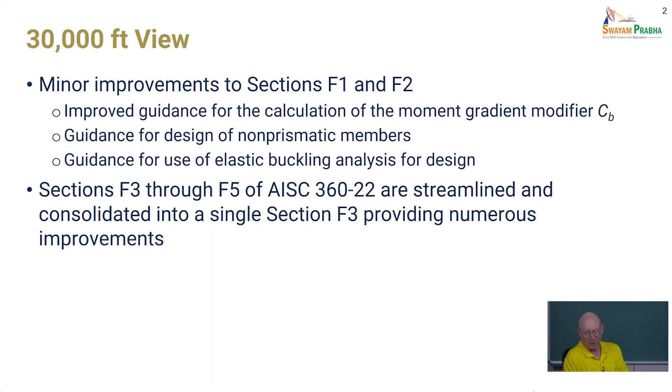Provide guidance in the specs to make it clearer how we can use elastic buckling analysis for design. So some of that is showing up in sections F1 and F2. But the major change in the 2027 specification cycle is to take sections F3 through F5, which addressed more general I sections previously, and consolidate those three sections into one section F3 that has a number of improvements in it. So I'd like to show you how the new provisions are working, and I'll relate what I show you here back to what's in the current standard.

So the way the new section F3 sets up is when we're looking at calculating flexural resistance, we consider three limit states. Number one, yielding and web local buckling. So we're going to look at that first. And that essentially sets a plateau resistance for the section.

This is similar in Eurocode, where if you have a class 1 or class 2, you have a plateau, right? And the resistance is the plastic moment. If you have a class 3 section, then the resistance is reduced. I think we have a little more detailed approach there, essentially a linear transition between plastic moment and yield moment in that range.

And if we have a slender web, well, that would essentially be a member with a class 4 web, and we have a reduction factor that approximates what we'd get in Eurocode or in the Indian standard by applying an effective width reduction to the web.

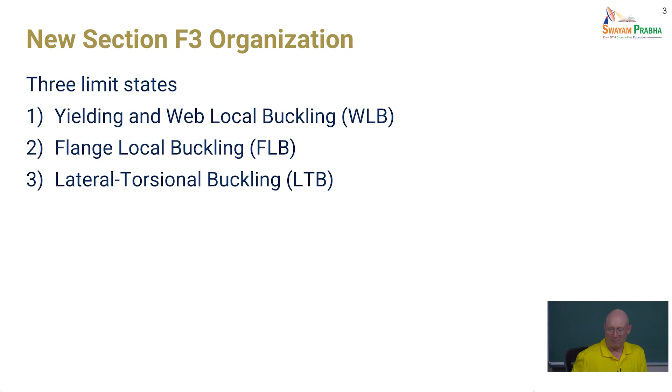Once we have that, then we'll look at how we use that with checking flange local buckling and lateral torsional buckling. So the first bullet here is pretty much what I just said. The plateau is defined here by the yielding and web local buckling limit. And in large part, the provisions are equivalent to the AISC 360-22, the current specification in sections F4 and F5, but everything's consolidated and there's some improvements here in the calculations.

If you dig into the sections F4 and F5 at present, you see some reduction factors called RPC and RPT. Those have disappeared. But the expressions are still the same, they're just written more directly without those factors. And there still is what's called a bend buckling strength reduction factor if you have a slender web. That was called RPG in the current specifications, and we've modified that to RB for bend buckling in this specification.

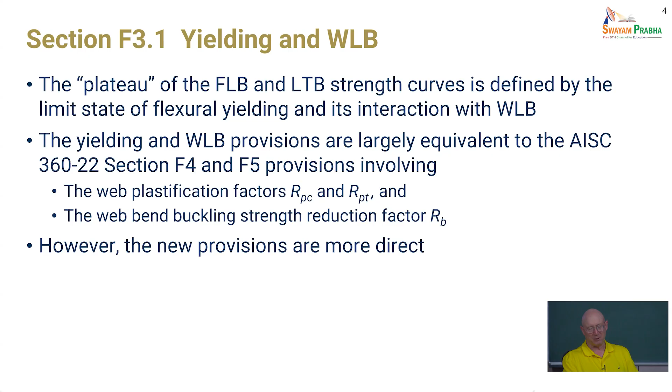So the way the calculation of that plateau strength works, if you've got a compact web in AISC, I'm going to refer to Eurocode a lot, knowing that the Indian standard is largely very close to Eurocode, so I'll mostly just make comments back to Eurocode here. If we have a compact web, it's basically class 2 in Eurocode.

So we're looking to be able to develop the plastic moment resistance. There are other limits that would be equivalent to Class 1, but the main specification provisions are just focused on calculating strength. The plateau strength is referred to as M subscript W, and it's equal to MP.

If you have a compact web, if the web is non-compact, then there's simply a linear transition between MP and MY, between essentially a Class 2 limit for the web and essentially a Class 3 limit for the web.

So Class 4 is what in AISC we would call a slender web. And then when it's a slender web, the strength is less than the yield moment, but rather than work directly with an effective width calculation in the web, we have a rather ancient equation that was developed way back in the day by Professor Basler in the early 1960s.

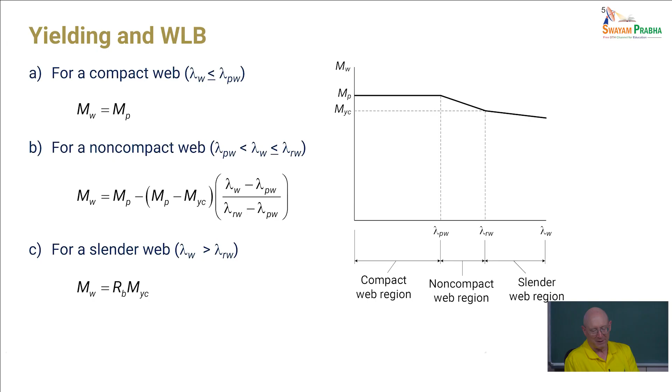That equation is the RB equation, was denoted RPG in the previous, in the current AISC 22 standard. So a fairly significant change here is with singly symmetric sections that have a larger flange in compression. So if you have a large flange in compression, your neutral axis of the section moves closer to the large flange, right?

If the section is doubly symmetric, or singly symmetric with the smaller flange in compression, we calculate a yield moment, or yield moment to the compression flange, as the yield stress times the elastic section modulus. HCY is basically the web depth in compression at yield, equal to the elastic depth of web in compression. So for singly symmetric sections, the tension flange has a smaller stress when we reach the yield moment, while the compression flange has a calculated stress just reaching FY.

If it's a section with a larger flange in compression, we've implemented a mechanistic calculation of yield moment when the compression flange first nominally yields. For this type of section, we get first yielding at the tension flange, then a spread of yielding up the web as we increase the moment. Once we reach nominal yielding of the compression flange, you get a stress distribution like you see here. HCY, or HCY over 2, is the depth from the bottom of the compression flange to the neutral axis for this stress distribution.

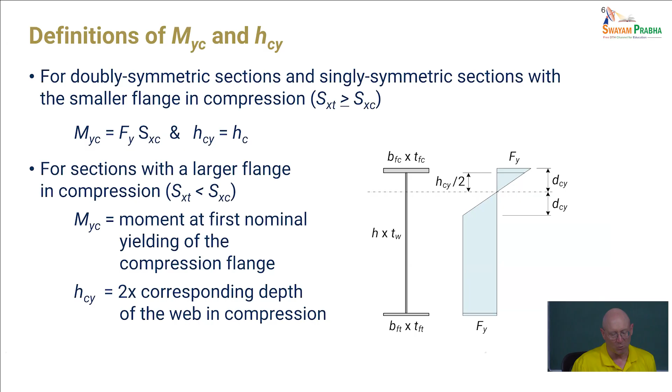Just like if you had a composite section—say a composite slab in positive bending, with effectively a large compression flange at the top—when we design composite girders, we allow extensive yielding through the web in calculating their strength, usually counting on the plastic moment. This essentially parallels that. Your MYC is a moment at first yield that we use as a base for continuing the calculations, but MYC in many sections that behave this way is very close to the plastic moment.

Along with that, there's an equation currently case 16 in the AISC table B4.1b, a more general equation for a compact web limit. Compared to the equations in Eurocode for Class 2 web, it's a fairly reasonable approximation, but a little more succinct. The compact web limit is a function of the ratio of plastic moment to yield moment. For doubly symmetric sections, the ratio of HCY to HP becomes 1, and the equation simplifies.

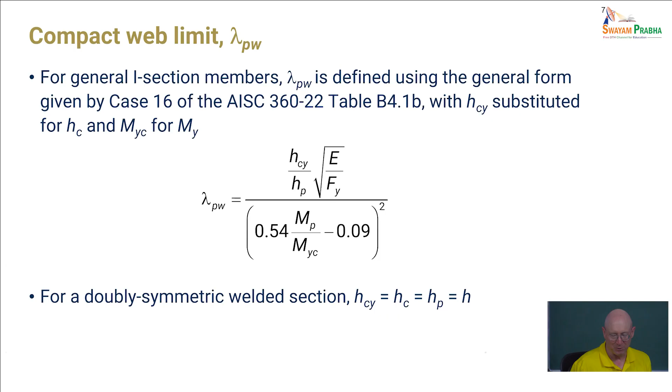But if you have sections with a relatively large MP to MY, you tend to get a lower limit for your compact web limit using this equation. And the non-compact limit—Dr. Lakshmi Priya basically discovered this in her research—there was sensitivity in terms of what we should use for that limit to the ratio of the compression area in the web to the area of the compression flange. The non-compact web limit is basically what we need for the web to be able to get to the yield moment of the cross section.

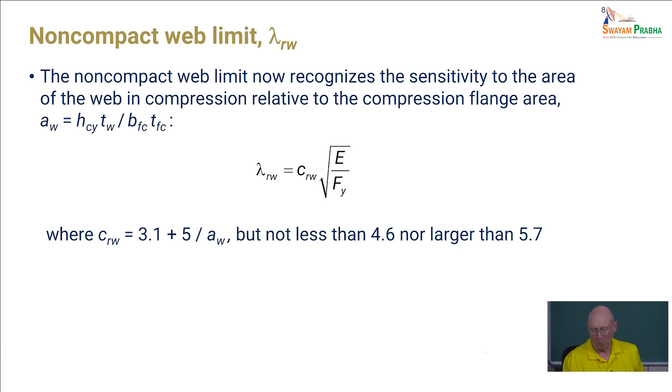And so, based on Dr. Priya's work, if you have a section that has a relatively large web compared to the flanges, so often if you have a very deep section with narrow flanges, you're going to tend to have a CRW that's 4.6, which is more conservative than what we have used in the past, which is the upper limit of 5.7.

And then this is the equation that is an approximation of basically the influence of using an effective width if we were to take that approach in the web. And the equation is the same as the RPG equation that we've been using. However, we're using it with terms.

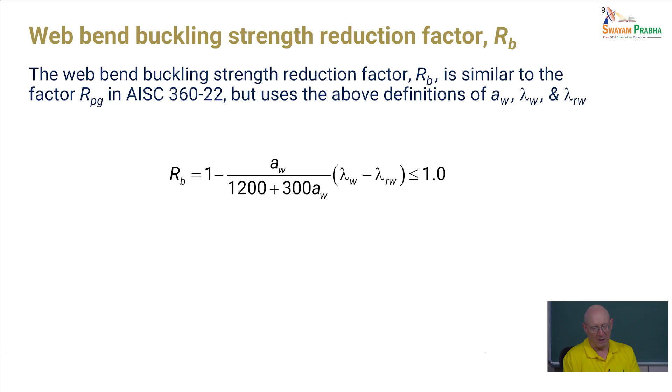The A sub W, the lambda W, and the lambda RW are keyed to the HCY, the depth of web in compression for the general case, whatever you have at the first yield of the compression flange. All right, so that's the plateau strength.

And then given the plateau strength, you'll see in the next few plots, we're plotting either flange local buckling strength or then lateral torsional buckling strength on the ordinate, and then versus slenderness term on the abscissa. So here the slenderness is of the flange, BF over 2TF is lambda F.

And the flange local buckling rules have been liberalized a bit. You can gain some significant advantages in this case if you have non-compact or slender flanges in compression.

So the new calculation will basically just use this linear function, which is a coarse representation of what we would get if we basically did an effective width approach to calculate the contribution of the compression flange. So it's accounting for some post-buckling strength, but tends to be accurate in some cases, but often still conservative.

But it gives you a larger strength than what we've been using, where the dash curve here is what AISC specifications previously have just been using, a pseudo inelastic buckling or elastic buckling calculation for the compression flange.

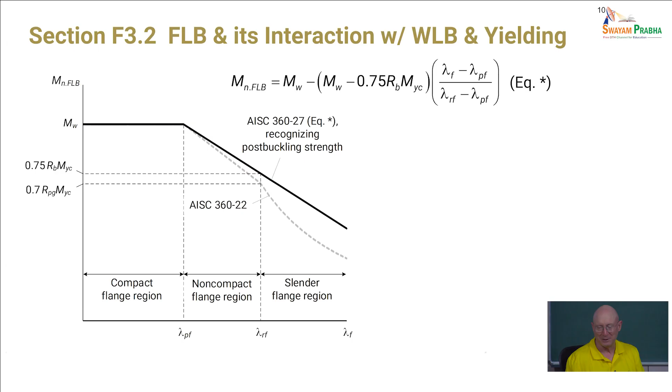For the lateral torsional buckling, there's some fairly significant changes. We're moving in the direction of using a non-dimensional slenderness that would be square root of Fy over F critical.

And so if the non-dimensional slenderness is less than the limit lambda p LT, so we'll look at how we can write that here in a minute, where we reach the plateau strength.

Otherwise, there's a linear transition, and then when we reach the limit lambda r LT, then basically we're into an elastic buckling calculation. So we still work directly with an elastic buckling LTB resistance in that region, in the last region here.

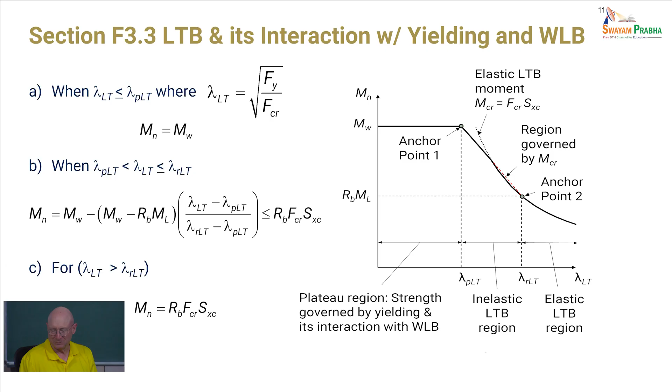I'll come back to this curve and show a little more about it in a minute. That inelastic to elastic lateral torsional buckling transition, that's tied to the slenderness lambda RLT, and it's tied to the moment ML.

And so ML is simply the elastic lateral torsional buckling moment at this particular LTB slenderness.

And in the general provisions, we're using 50% of the yield moment as the moment at that transition. If it's a rolled I-section member, we're using 70% of yield moment. So that's consistent with the earlier sections of Chapter F.

Those sections, the first section and the second section F2, are addressing only compact rolled sections. So for general sections here, if you have a rolled section, using ML equals 0.7 MYC gives you comparable results to what you would get from section F2.

And the LTB slenderness at the elastic to inelastic transition, lambda RLT, that's simply square root of Fy to basically ML, the elastic buckling moment at that level, so ML over SXC.

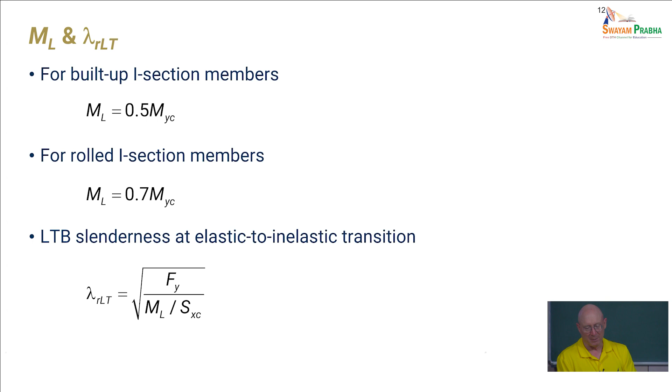Now, it's often questioned in the U.S. — a lot of concerns — we're essentially lowering that limit from what we've used traditionally, 0.7, to 0.5 of the yield moment. So a lot of engineers will ask the question, look, your residual stresses, are they really that large where you need to reduce to only 50% of the yield moment?

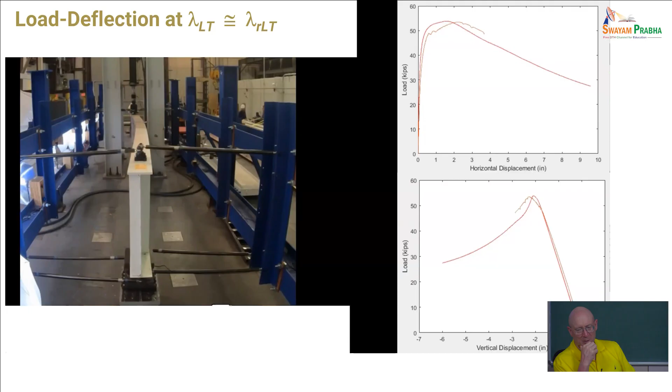And so the answer to that question is there's a lot more going on than just a moment, a stress due to the major axis bending plus an initial residual stress.

So we're a little past the peak load here, but at the peak load in this test, you can see there's quite a large amount of lateral bending of that compression flange on the top.

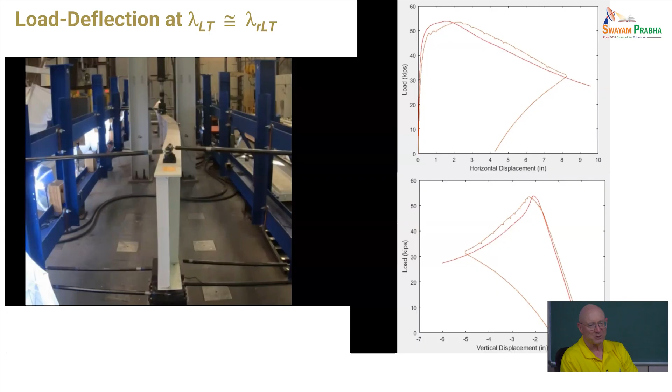And so we've got a behavior where there are initial residual stresses, then to that we're adding our major axis bending stresses, but with any out of straightness of the compression flange, as you're approaching the elastic buckling moment level for a member that has a slenderness close to lambda RLT, you're getting substantial lateral bending, and that's tending to cause a reduction. That's a big part of what's causing the reduction in the strength.

So what you can see here on the right is basically our prior prediction for this particular test, and then the test result.

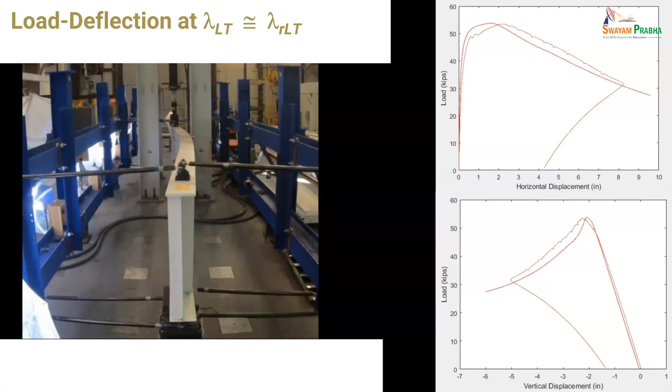That was the test I was showing you, a moment gradient test of a slender web. That's the simplest case. In those cases, lambda PLT is a constant 0.35 for all cases.

However, what we were finding was that if you had a web that was more typical of a rolled section, well within the compact web limit, the provisions in section F2 are actually doing a good job of predicting the experimental results, whereas the approach we were looking at that worked well for slender web members wasn't working so well. It was tending to be quite conservative.

The way that we looked to try to solve that was basically to adopt essentially the way that it's being done if we have a very stocky web. I'll try to show this on the next slide to explain it. The lambda PLT prime equation here is basically what we get with the current approach in section F2 of the specification, except we put a cap of 0.8 as an upper limit on it.

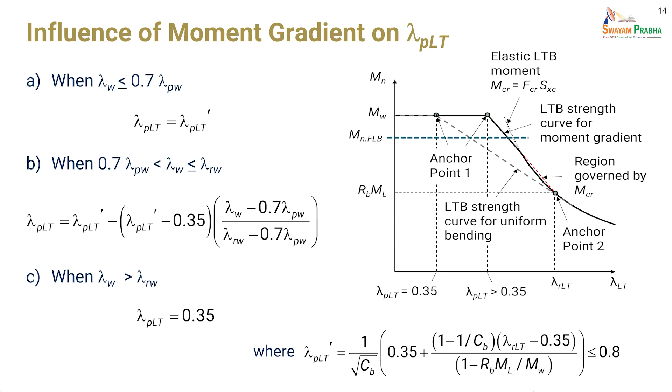So this slide is an attempt to show how the current section F2 works and the way that AISC has traditionally applied the moment gradient factor CB.

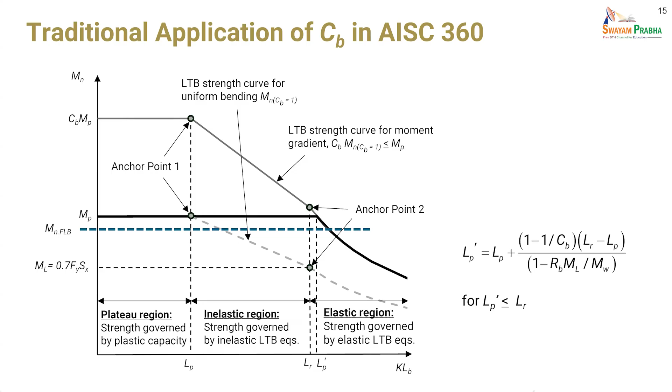CB is a constant that is basically calculated as the ratio of the elastic lateral torsional buckling strength given whatever variation in moment or moment gradient that you have within the unbraced length you're looking at, divided by what would be the elastic lateral torsional buckling strength if we just had uniform bending within the length.

And so AISC, since 1986, has always taken that elastically calculated CB, and then we scale the entire uniform bending strength curve by that factor, but then we limit the maximum to the plateau strength.

So here I'm showing it for a compact web section, so the plateau strength would be MP, and if you have a high enough moment gradient, you can actually create a situation where the calculated strength is an elastic lateral torsional buckling strength. That's this part of the curve here, all the way up to MP, because the uniform bending strength curve is plateau, and then the dashed curve, the dashed gray curve that you see here.

And so if we scale by CB, and if CB is large enough, we end up with basically an elastic curve and then plastic moment strength.

I'm showing this as a case of, well, how confident are we that we can actually get that? So we've done some work where we've gone back and explored the available experimental test data in the literature for, okay, what is there justification for this?

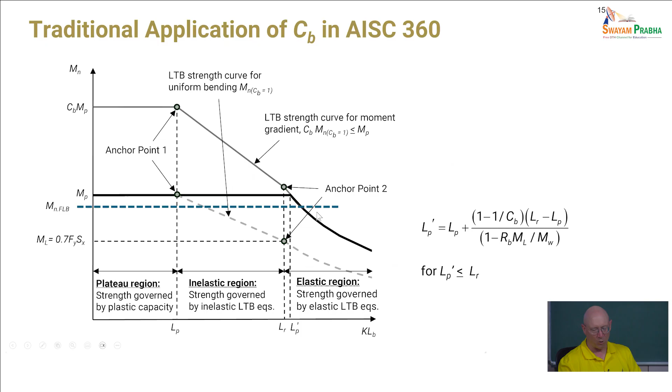One thing that kind of saves us here is that for a rolled section, the section properties, the flanges are typically wide enough, even for the beam sections. You'd have to have a super long beam to create this problem, and you're getting into a realm where you'd be challenged that you're not going to have a serviceability problem if you were using such a beam for the lateral torsional buckling strength.

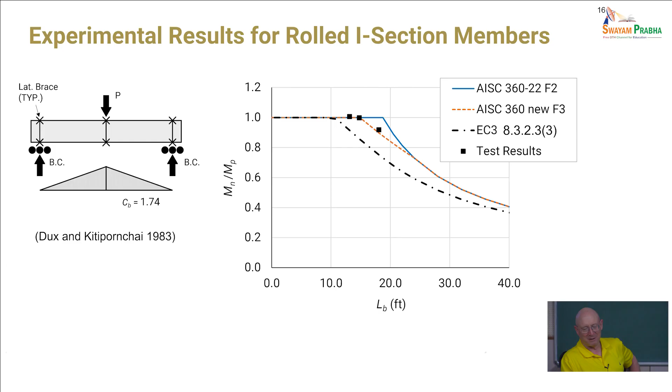These are rolled beam sections, so the web's really not stressed very much in terms of shear stress. It's really an issue of the way we scale by CB.

Dr. Helwig and his associates at University of Texas, Austin, have been doing parallel research where they had concerns about the influence of web shear on the elastic LTB resistance, and the web shear tending to cause lateral distortion of the cross section. I'm just going to give you a light touch on these equations and essentially show you the results that we get.

With their equations, one thing that we've done in the past, if you have a slender web section, is we would base the strength on J equals 0 in the American standard. I think we're the only ones in the world that do it. And part of the rationale for that was that it gives some approximation of lateral distortional buckling effects.

You're basically discounting the help from St. Venant torsion. It also simplifies the equations significantly. If you're doing a hand calculation, it creates a major pain in the neck for Balint if he's going to try to implement that, because when's Consteel going to use J equals 0 and when is it going to use a J for different calculations?

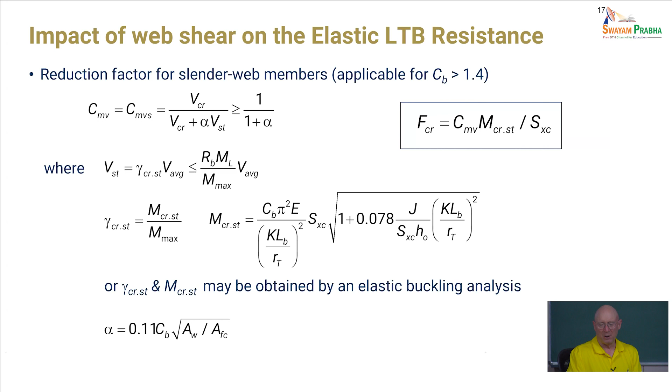So I think it's a good thing that we're moving in this direction, and we'll always calculate the LTB resistance using all the terms from the mechanics for the elastic buckling resistance. But for these cases where there's a clear reduction in the elastic LTB strength due to lateral distortional buckling, we're taking a reduction due to the shear in the web.

So this shows results for essentially a metal building type girder section. It has 6 by 3/8 inch flanges and a 36 by 5/16 inch deep web.

And what you can see here is that the test simulations, I'm just showing you simulation results here, if we're at an unbraced length, this is basically forked boundary conditions at the end, or torsionally simply supported, or K equals 1 for lateral torsional buckling if you're calculating an effective length factor for lateral torsional buckling.

And so if we have a length for this specimen, an unbraced length that is in the neighborhood of about 10 feet, notice what we're getting is that where the current standard would predict you're getting about 85% of the plastic moment here, we're only getting about 60% from the simulation.

So these sort of simulations were things we did early on, working off of the concerns that were voiced by Professor Joe Yura with some of the things with the distortional buckling, with the elastic buckling studies. And what we were finding is actually these sections, the results are even more suspect for the current spec calculations.

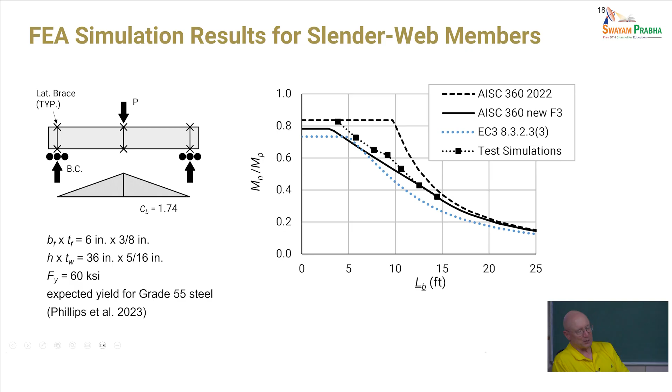So that's what's causing us trouble in terms of getting to the moment resistance. It's basically that lateral distortional buckling, and it's exacerbated by the onset of yielding that's happening in the section.

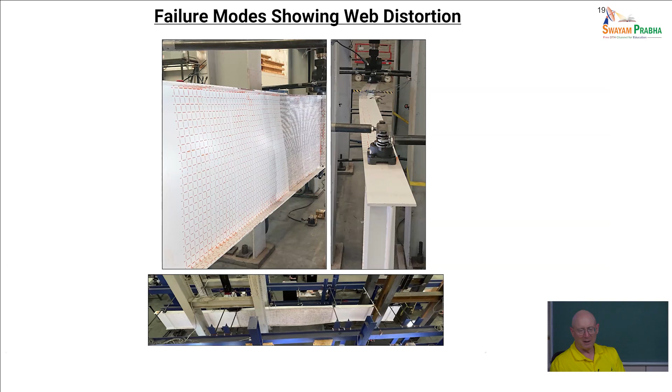Well, no. What's happening is significant lateral bending of the flanges that I showed you in the experiment in the video a bit back. That lateral bending is causing early yielding of the compression flange out within the unbraced length, and that behavior is exacerbated by the web distortion we're getting, which is pushed by the high shear stress in the web.

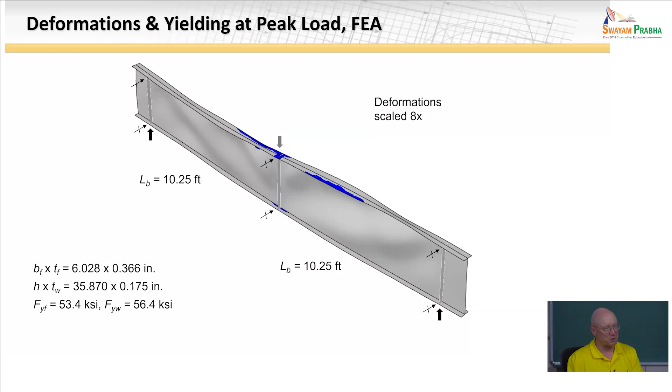So given some FEA simulations to try to get our handle on the problem, we designed a suite of 6 experimental tests to try to get confirmation of the behavior. We did 3 three-point bending tests, and 3 tests where the test configuration put the critical unbraced length in full reverse curvature bending.

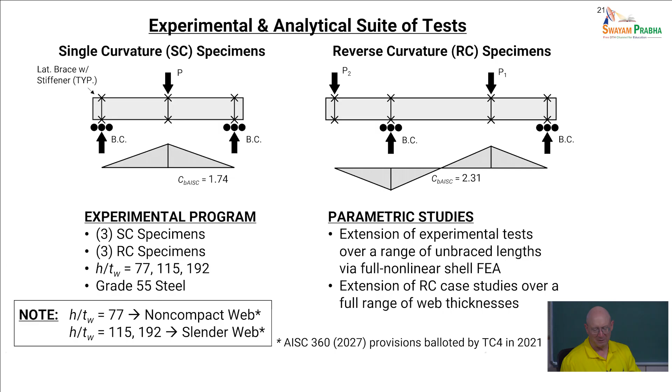For each of those tests, we had specimens with a range of H over TW. These are doubly symmetric sections, so H over TW is the same as HC, HCY, HP. The stockier web had an H over TW of 77, classifying it as close to compact, but slightly non-compact using the provisions moving forward. The other two webs had an intermediate slenderness of 115, and a fairly high slenderness of 192.

I want to highlight what's going on with the case with the intermediate web slenderness. I'll use that one to highlight for you what's going on, showing you simulation results, then I'll show you the experimental results in a minute.

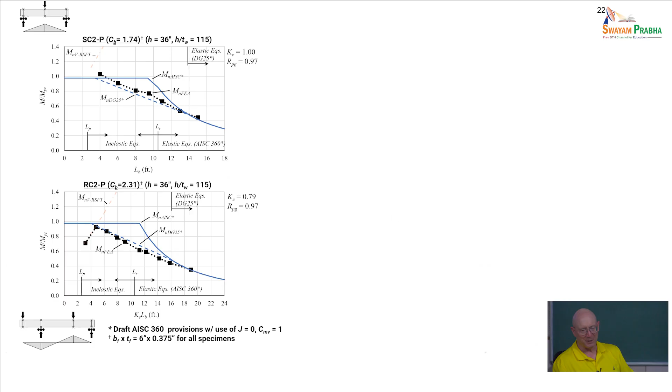So looking at what's going on here, the plots in this case are done using J equals 0, using an RB equal to RPG, less than 1. This is basically the approach that Balint has implemented in Consteel. It's slender web, so the calculation is basically the same, or nearly the same, as what's in Design Guide 25 for designing frames using non-prismatic members.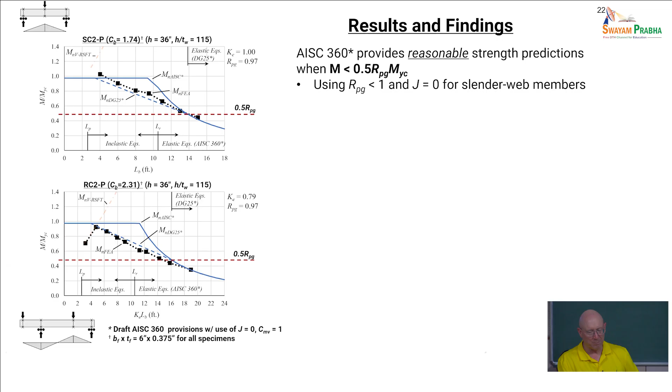What we can see here is fairly substantial overprediction. The top plot here is for a 3-point bending test with this intermediate slenderness web. The bottom plot is for the reverse curvature bending. With the higher moment gradient of reverse curvature bending, we've got even more damning results in terms of the predictions from the current specification, which is the top curve here, with the shaded region showing the comparison to that.

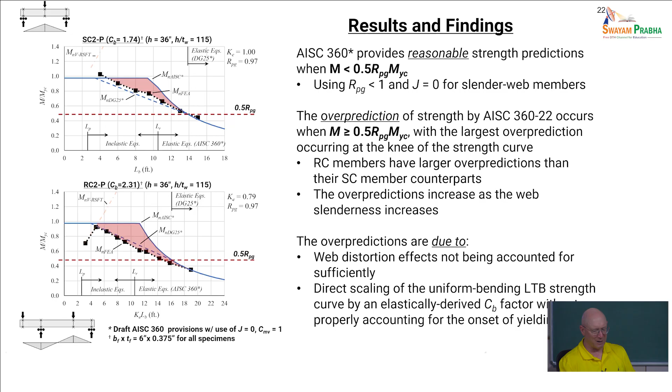What we're seeing from analysis of tests and of the FEA simulations is this inability to predict the strength in the current standard. It's coming from web distortion effects, also exacerbated by the way that in the current standards we scale the uniform bending strength by Cb without considering whether we're getting any impact of the additional yielding that will occur before we reach the plateau strength.

The middle is the intermediate web slenderness. The plots to the far right are the specimens that had quite high web slenderness.

So what you can see throughout these, again, the middle and the rightmost plots, those are specimens that all classify as slender webs in the standard that is proposed for 2027.

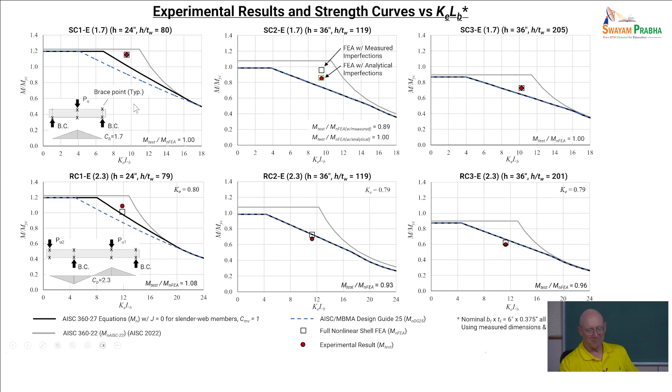And so you can see here where we are relative to what we obtained from the simulation and from the experiments. This just shows another plot with the full simulations, FEA simulations of the various lengths with these specimens and where the simulations fit more broadly.

And our best take on what's going on here is, so these curves, using the Eurocode 3, we're basically required to use curve D of the LTB curve, which is the most damning, it gives you the lowest predictions in strength. And so our thinking is that curve D is probably a little more conservative than is justified for these types of cases.

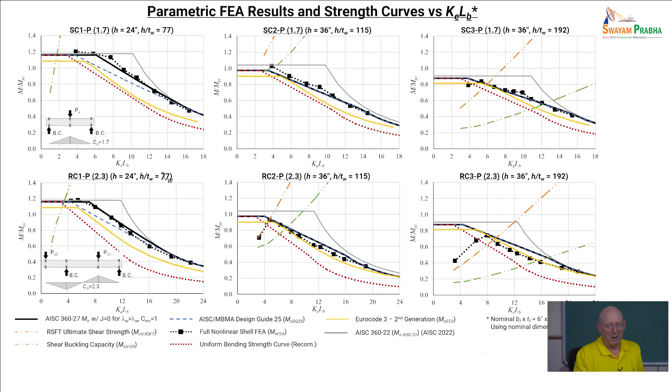If we were to use curve C, we'd be very much closer in terms of correlation with what we're getting with our test simulations and with our experiments.

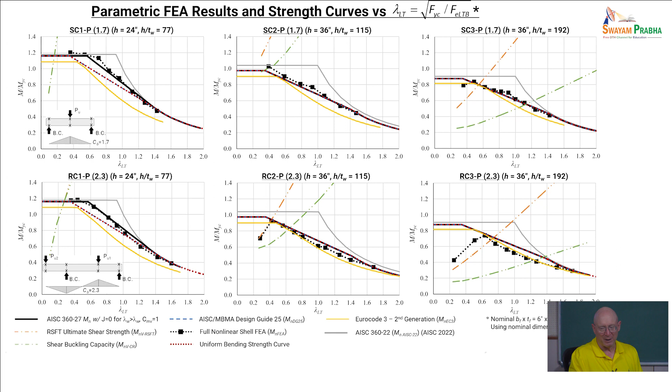And this shows the same plots, but plotting in terms of the normalized slenderness lambda LT. So those were all doubly symmetric specimens.

We also did a suite of tests where we looked at singly symmetric sections with larger flanges in compression. And so in these cases, the web is quite thin. You can see, if you look at the speckle pattern or the grid pattern on the web here, that there's a significant S shape occurring in the web as we're reaching strength condition.

However, for these specimens, the neutral axis, either elastically or as we start developing some yielding, is very high and is very close to the top flange here. And so the web is in predominant flexural tension, and as a result, based on our calculations, this section actually classifies as a compact web.

And so we're using plastic moment resistance as the plateau strength, and you can see where this is coming in here. So the top plot is the strength normalized by MP versus an effective length. The bottom plot is the same ordinate versus the non-dimensional slenderness lambda LT.

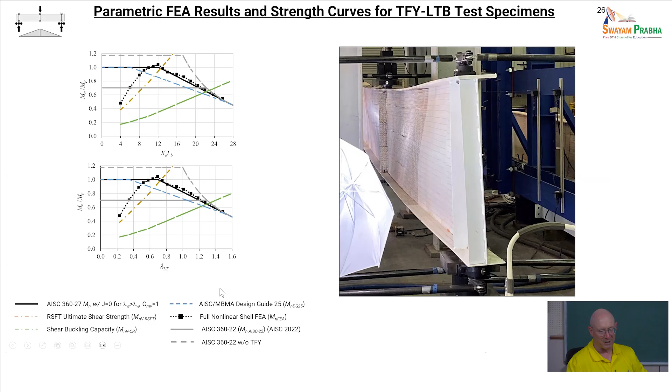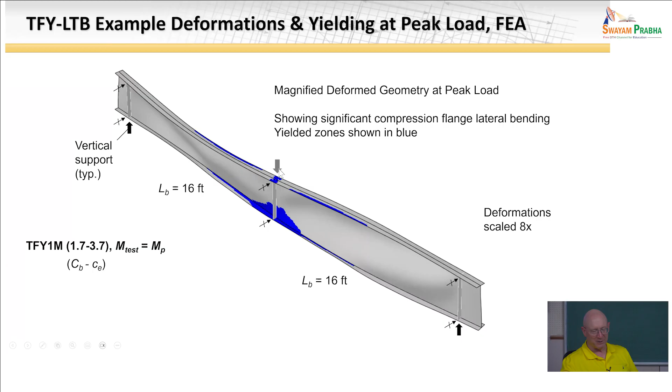So all the large amounts of blue there in the bottom of the specimen is showing that the amount of where the yielding has progressed basically at this maximum strength here of the specimen. All right, so that's an overview

of where the American provisions are going. I've put this on the general tab on the Google Drive. The provisions are provided there. There's also the current AISC 360-22 specification and commentary there. And then one other file there that is the table in Chapter B that addresses the compact and non-compact web limits for members in flexure.

We've been looking at this quite intently for a number of years now with the AISC specification committee, because clearly there's a safety issue, or at least an issue that the specification isn't doing very well if we're getting situations where the predicted strength is like close to 1.0 and we're only getting more like 60% of that.

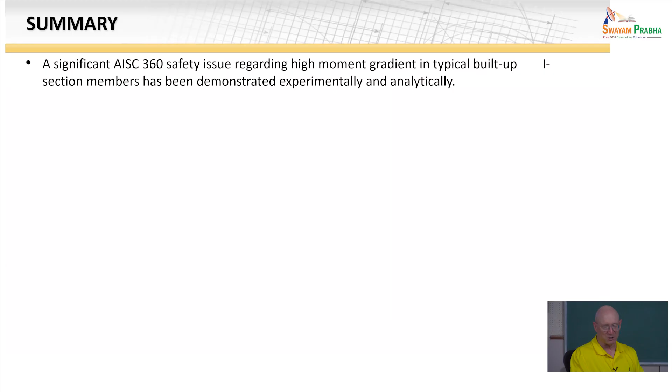We believe that the provisions that are moving forward solve the problem for slender web I-section members. We use the elastic CB only with calculating elastic lateral torsional buckling stress. We're not scaling a curve that's an inelastic strength curve by an elastic factor, an elastically derived factor. We're expressing the LTB strength curve in terms of the non-dimensional slenderness, lambda LT equal to square root of Fy over Fe LTB, or F critical LTB. And that's similar to the way we handle column curves.

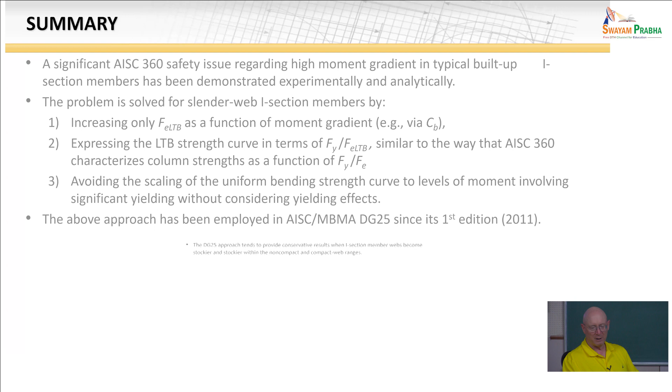That's our argument, is that, look, we do this for columns, why shouldn't we be doing it for beams? And we're avoiding applying that C sub B in cases where we can see that it's not performing well. We've used this approach in Design Guide 25 since its first edition in 2011, so it's not that it's new to North American practice. But the problem that we tried to address in the work I showed you here is the Design Guide 25 tends to provide conservative results when we have stockier I-section webs.

So we've addressed that by implementing equations that achieve the same calculation that the current AISC approach achieves, in the limit that the web is less than 70% of the compact web limit, and then with an interpolation between those results and the results for slender web for intermediate web cases. And then we have a reduction factor on the elastic LTB resistance for accounting for shear stress in the web.

And so that's, I think, a good change there in terms of we can base our calculations all uniformly on the mechanics using all the terms, both the St. Venant torsion contribution as well as the warping rigidity contribution to the lateral torsional buckling strength. In all cases, then we take a reduction off of that.

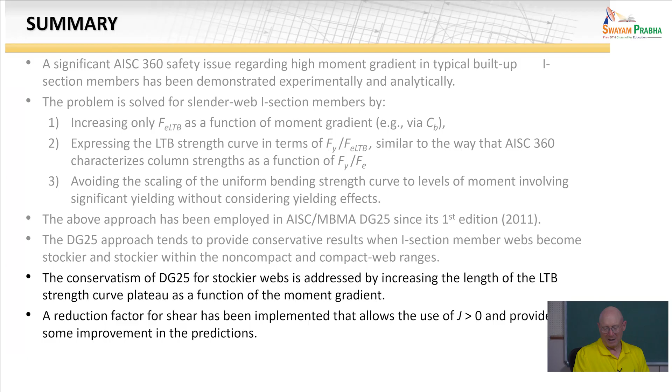I think it's fair to say that the Eurocode results are giving adequate predictions, tending to be conservative to accurate, and the Eurocode is not using a shear reduction factor. But the American code tends to base our elastic LTB resistance on a theoretical elastic buckling. So I think we're a bit more on edge there with the way we do the calculation.

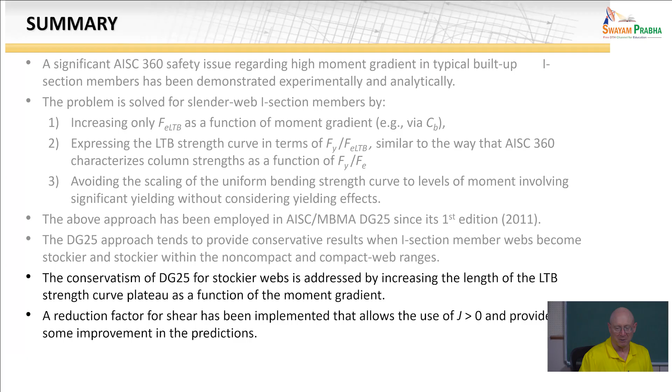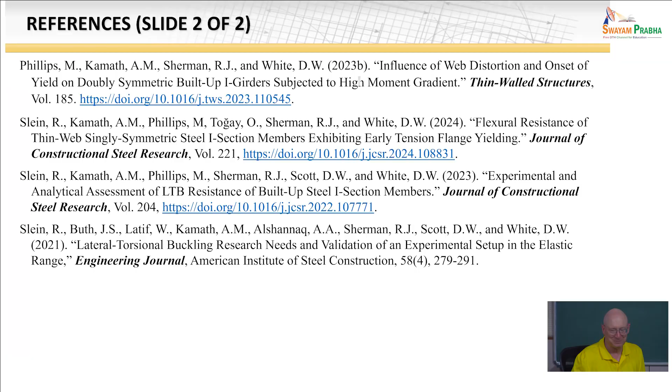And so I think it's with good reason then that, okay, if we're going to base our elastic buckling resistance calculations that way, we should probably be taking this reduction due to lateral distortional buckling. And there's a number of references here that if you're interested in following, and maybe possibly even taking some of this work further in your studies and your work, you can dig into what we've been studying. All right, so that's the lecture for the day.